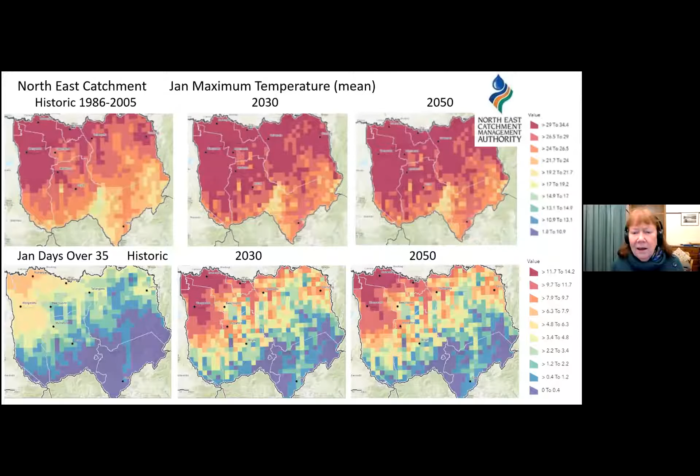And we can see in our record that this is happening as well. So that top graph is Wodonga, days over 38 degrees from about 1970 on, and you can see that clear pattern of warming from about the mid-90s onwards. And that's the pattern that we're seeing projected in these future patterns.

And even though we've had a mild summer for various reasons this year, the previous two summers, we might recall, were not mild at all. And in fact, 2019, as you can see on that map, that dark brown colour, was highest on record in terms of heat. So 2019 was the summer where we had a number of highest ever temperatures broken. And in Wodonga, they broke their record twice in about a week. In January, I think Wangaratta got very close to its record.

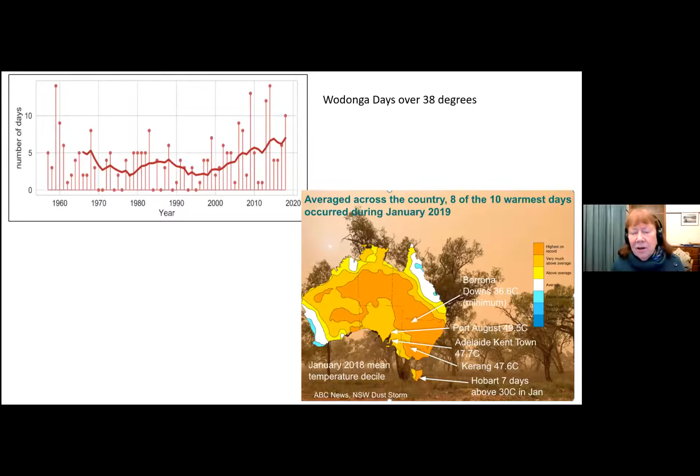And we have to start thinking about what's going to be happening with our summer in the future and how that's going to affect us. Tonight we'll hear about building operations and planning for subdivisions. So you can drill into this data, and this is actually some data I pulled out. This is for the pattern across the whole catchment. And this is actually a graph of temperatures across the year. So this work doesn't just tell you what's happening in a particular area as an average. You can actually pull out the pattern and have a look at it as well.

And so the grey is that historic period, 86 to 2005. The blue is around year 2030, and they don't just take 2030, they take a range around that period and examine that. And then the red is the 2050, and you can see with temperature that pattern climbing. But what's interesting here as well is what's happening to the length of summer. So you're looking down the bottom at the months across the year. And if you have a look, say, at the right, we've got the start of summer, if you can see my cursor, December.

And that temperature that was historic in December will occur in the future, and we're seeing this pattern already as well, earlier in the year. So that same temperature over here is going to occur a month earlier. And at the other end of the season, in February, that temperature that we think of in February historically is going to occur about half a month later in the year. So summer's not only getting hotter, it's getting longer. And we're seeing that reflected in that last really bad fire season, and we have been seeing it for some years, where the fire season starts earlier in the year. It's basically moving forward in the year, and that's just reflecting these hotter conditions that we're having.

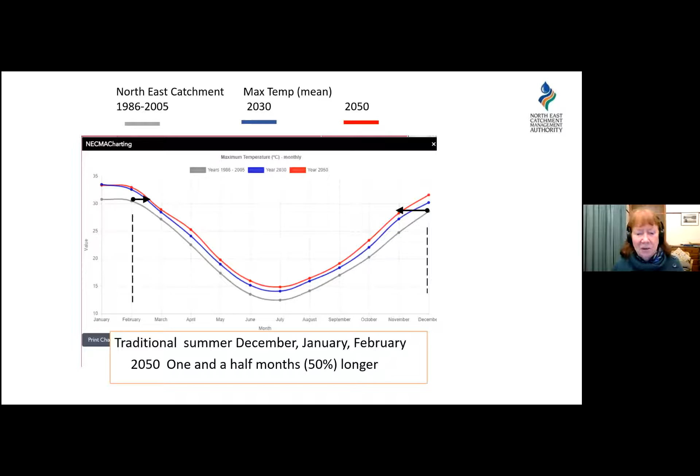So when we have a look at rainfall, temperature in terms of science, knowledge and projections is, I guess, much better known in its future patterns than rainfall, which is a lot more variable. So when you have a look at rainfall, the darker the blue, the higher the rainfall. The yellow areas are that lower rainfall. And again, you can see some change in the area, but it's not as stark as that temperature change. But when you combine temperature and rainfall, that has an effect on how much water will run off from the catchment, because you're going to have higher evaporation.

Just if you pull out the figures for this, about 2030 is not too bad compared to that historic, which gives us, I guess, a decade to make some preparations. But by 2050, we're seeing about a 10% decline in rainfall on average. Not every year will be the same. The sort of thing you'll see is these hotter, dry years occurring more often. And so maybe we would have had one of these really hot years every 6-7 years in the 1980s sort of period, and now we might be seeing them one every 5. I'm just giving you a pattern here.

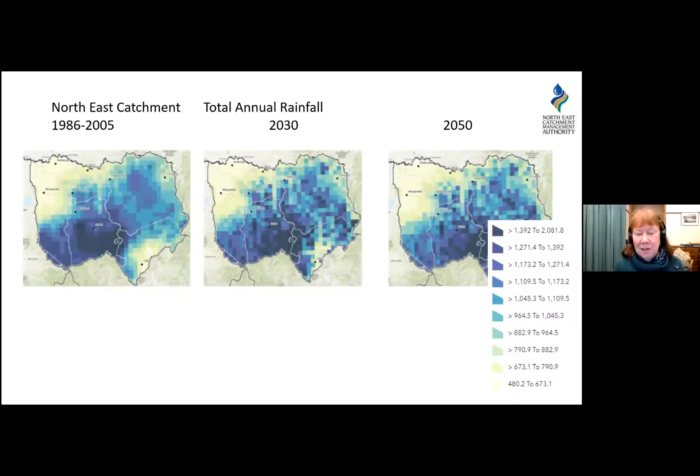Now, these maps have a look at what's going to happen to that runoff. As I said, there's a combination of the rainfall change and the higher temperatures. The browner areas are decreasing runoff. And again, you can see this pattern across the catchment. You've got the historic over here on the left, 2030 on the upper right, and the 2050 on the lower right. And so you can see in our area, there's a drying pattern happening, surface runoff, and over in the east as well as a number of areas down the south.

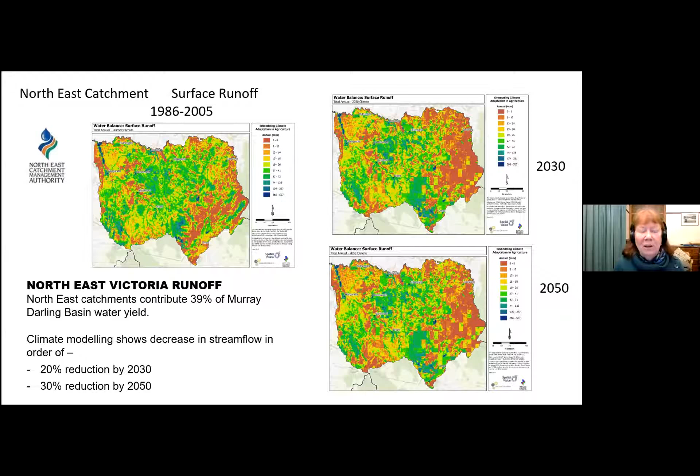So overall, and again, this still has a degree of error in the projection, but the modelling is of the order of around 20% reduction in runoff and stream flow by about 2030 and up to 30% by 2050. So that's quite significant. So overall, what it means is we're going to have, on average, not every year, but more years than we've ever known before will be longer, hotter summers and drier years.

So this just gives that sort of summary, and trying to bring it down from some of the national figures that we might have. So for Australia, we know that in the last century, the mean has become around 1.4 degrees hotter. But when the mean becomes hotter, those extremes become more marked. They expand further than we think from the mean. So we're looking at twice as many days over 35. As I said, summer is going to be at least a month longer in the future.

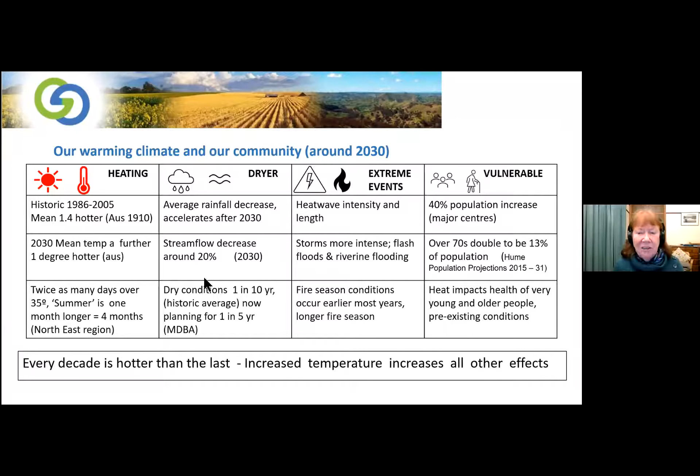By 2030, we're going to have these drier conditions. The fire seasons will be longer. And the other issue is we're looking at potential heat impacts because we're going to have an older and larger population as well. So they're the sorts of things we have to think of. And for the last few decades, every decade has been hotter than the last. So it's quite a lot to adapt to.

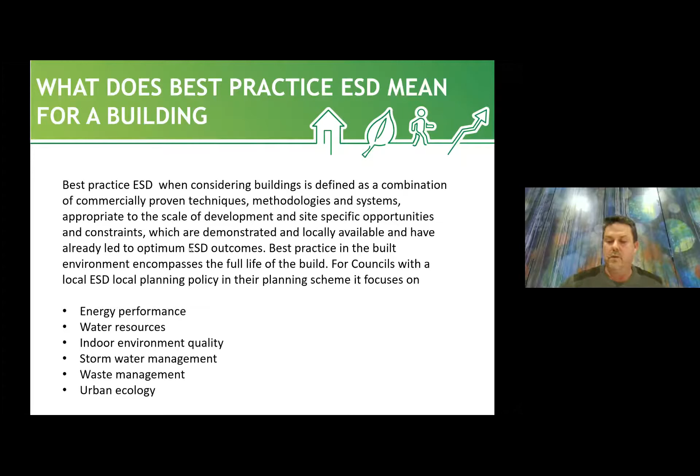The overarching objective is that a development should achieve best practice in environmentally sustainable development from the design stage through to construction and then into operation, which goes to the point that was just being mentioned, that some people don't always take up the opportunities provided to them, be that via landscaping or by how they operate their dwellings.

Local government need to be leaders first, in combination with the planning system, and to ensure that a council is delivering on what they expect the community to deliver. Each council should have their own sustainable buildings policy, which goes beyond what is being asked of the community. Preferably zero carbon developments presented by councils, but we'll get to zero carbon in a minute.

What's happening at a state government level? Due to the number of local governments with an ESD local policy continuing to increase, the Department of Environment, Land, Water and Planning has moved to introduce statewide ESD measures into all planning schemes across Victoria. I'm certainly not here to bash the state government departments because they're doing some really, really great work. And this project that they're delivering now has stalled a little bit, but I'm hopeful it will kick back into gear and deliver ESD requirements to all the planning schemes in the near future.

This will recognise ESD across all local governments, not just those who have extra resources, both human and financial. And generally speaking, those councils that do have an ESD resource are generally more well off in comparison to smaller rural and regional councils financially. But it will become the measurable requirements for developers to meet moving forward.

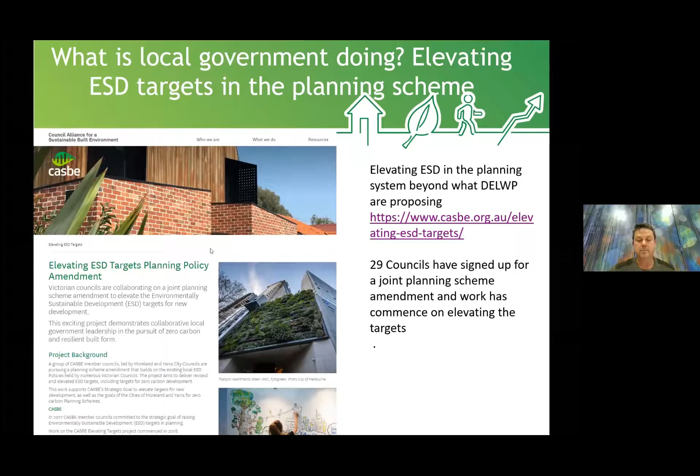For many rural and regional councils, the creation of a subdivision results in the creation of a new community. What started off with 6 councils in 2017 grew to 16 councils in 2019, and now has hit 31 rural and regional councils, along with growth area councils, trialling the sustainable subdivision framework over 18 months. That's 31 of 79 Victorian councils, which is the highest uptake of any voluntary scheme anywhere that I'm aware of. It's an extraordinary number of councils trialling this.

The aim really for us is to collect data on what subdivisions of greater than 3 lots are implementing across the participating councils and work with willing developers to implement ESD measures into their projects. Admittedly, there's been limited uptake by developers at this stage, and I totally understand that. It's quite a large document to enter data into, but the data is what's important at this early stage, and understanding what we're doing well, where we can improve, and how the planning system assists in setting the measurable standards in the future is really important.

Sorry for ranting on about the planning scheme, for those of you who are still awake, but it's a bit of a passion of mine, and one where I feel there's the greatest opportunity for local governments to implement and actually make meaningful change. So the creation of a subdivision is the creation of a community.

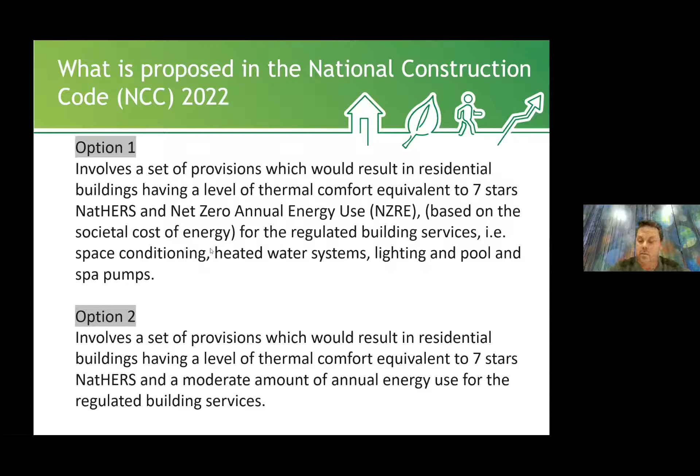This is basically telling you that the National Construction Code is moving to 7 stars in 2022. And if you're not building to 7 stars now, or starting to design to that, then your buildings will be obsolete very soon. So what does the future look like? It's inspiring to hear Dion talking about what he's wanting to do and is doing and will continue to do. And there are others doing similar things now.

Well, the future is here already and exists in developments like The Cape in Cape Paterson just south of Wonthaggi, where dwellings are a minimum 7.5 stars, have a minimum 2.5 kilowatt renewable energy system attached, in a community where water quality is a high priority, with electric vehicle charging stations, and trees and vegetation to reduce the urban heat island effect and provide cool paths for people to use alternative transport modes. The subdivision is not connected to gas, hence the housing is all electric.

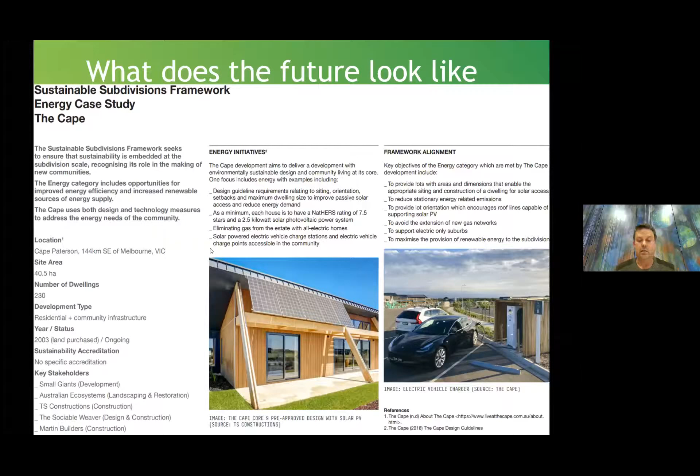Here's another example. This is a case study of Salt in Torquay. And as well as the two examples I'm showing, there is another one just being developed. It's a Villawood development of land in Sunbury, where they're not connecting the subdivision to gas. Instead, they are offering to provide solar and battery storage as part of the land package. This is actually cheaper for Villawood to provide, and the uptake from residents buying the lots has been overwhelming, and they said it hasn't affected their sales at all.

It's about integrating water quality measures on site when land is not too flat to allow the water to be soaked back into the land and be treated on site before going back into the waterways, not shipped away via a pipe straight into creeks and waterways with high nutrient loads and suspended solids.

My takeaway message is that the state government is moving on ESD. The National Construction Code is moving to 7 stars in 2022. So no one should settle for less, otherwise your dwelling will be obsolete before complete. It's all about all of these things and many, many more things, but 10 minutes is not long, especially when you're focusing on legislative stuff.

Greater planting of street trees with canopy coverage and also around your home, depending on bushfire issues. Water efficient fixtures and fittings, rainwater tanks, landscaping that includes local plant species. Ensuring there is great crossflow ventilation, access to quality natural light and fixed shading to north windows, and operable shading devices to east and west facing windows.

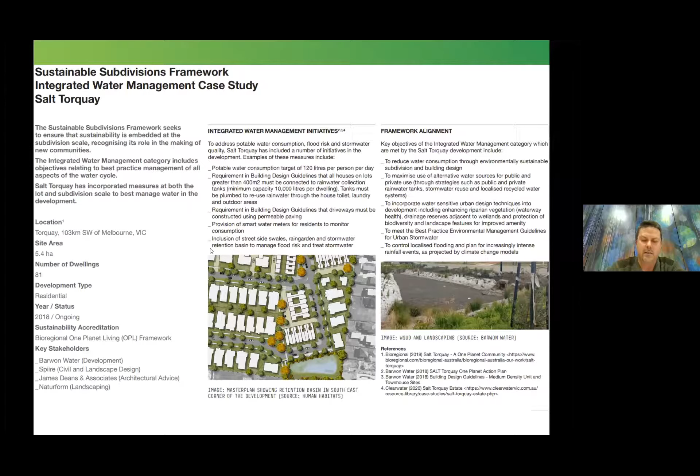Too often I hear about and see a great set of plans be handed over to someone who doesn't understand what it takes to make a building airtight, how to use permeable membranes and installs them incorrectly, and how to ensure mold doesn't grow, has not installed insulation correctly and created a break for air to leak out, hasn't insulated the corners of the building, and generally just hasn't taken the plans to the level that they were designed to. Sorry I went over, and thank you everyone.

Simon, thanks very much for that. A great sort of picture of the environment that we're working in, a few tips at the end there about how to get what we need from the people providing us with services if we are going into the building. Thank you again for that. And finally, our last speaker tonight, Lockie Gale from Ovens and King Builders here in Wangaratta. So Lockie, if you're ready to go, I'll hand over to you, please.

Thanks very much, John. It's a pleasure to be here, and it's a pleasure to listen to the other speakers. I've really got a lot of value out of listening to all of them. Clearly a lot of passion there and a lot of knowledge, and my hat's off to all of them. They're doing great work.

From my point of view, I guess I work at the pointy end of actually coming up with the goods in the constructions that we have. I'm very fortunate to work on some really special houses. I know that in the audience tonight, there's a few people that know that personally, which is really, really good. I'm sure some of the stuff I've got tonight is very much preaching to the converted, but in the time I've got, I can only talk to probably 2 or 3 things. Some of it's been touched on already, but I just want to underline that.

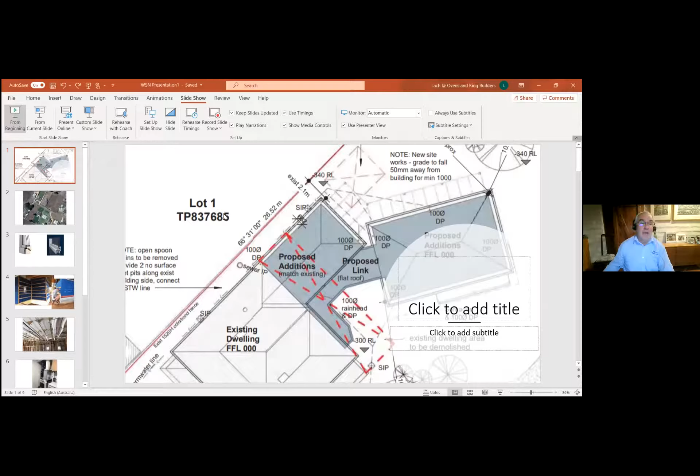I want to share my screen. I've got just a few photos to talk to, which I hope will illustrate some of the points. Some of these photos might be familiar to some people. I hope they've been done discreetly. So I want to talk on 3 things. I want to talk about orientation very briefly, because Simon and Dion have both pointed out the importance of that. I've got some practical examples here. I want to talk about technology for better performance, and I want to talk about the thoughtful execution of these things we do to get the result.

So here's a screenshot of a plan that we're currently working on. It's an existing house. It's an older style house. It's a Federation house, double brick, thermally. We all know those older red brick houses facing the street. Window orientation just wasn't a factor in 1910 when they were built.

But here's an example of a renovation extension where the thought's gone in to create a new living space, which is going to take advantage of solar passive design principles, get some northern orientation in the main living area, and help transform that house into a much more efficient, much more livable space. It's still done in a very compatible style to the existing home. It's still red brick, but the cavity red brick is insulated. The windows are double glazed.

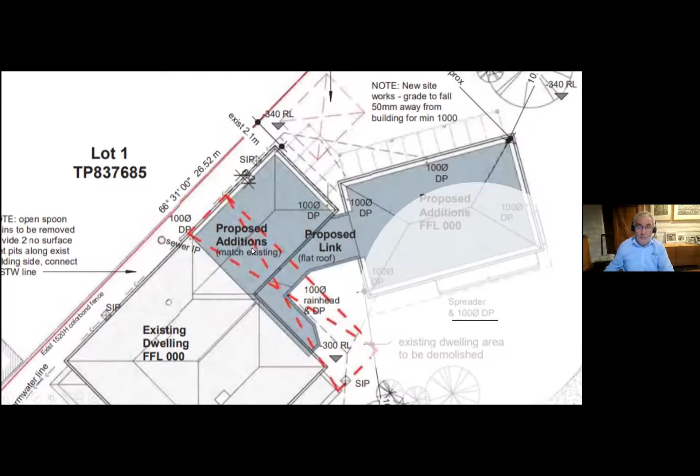And yet the house we built, which rated pretty well, is certainly very livable and very comfortable. It didn't take much on a block that size to achieve great orientation. Too often we see estates where this mindset of you've got to face the road just rules. But it can be done. It absolutely can be done. So orientation, it's basic, it's free, it sets you up, and it's proven. So when you sit down to design, that's the first thing.

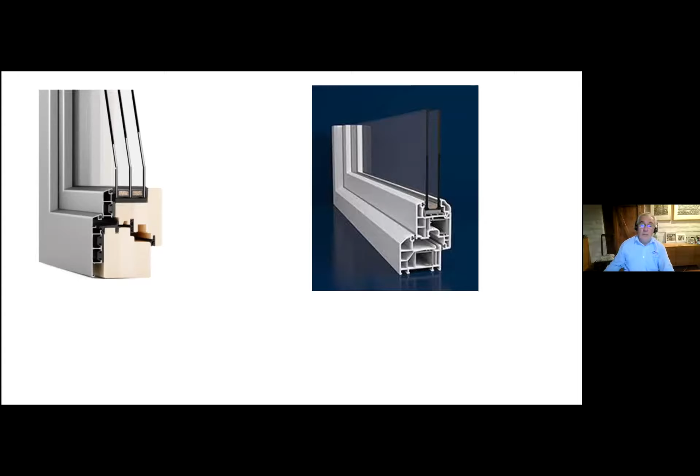Membranes is increasingly an area of development, and Simon alluded to the importance of membranes in controlling moisture, controlling mold, things like that. In recent times, the traditional sisal paper, the silver foil, often with a blue coating, often with a builder's trade name marked on it, the National Construction Code has largely sidelined that because in effect it doesn't breathe. It doesn't breathe at all.

An analogy is wrapping your leg in a plastic bag. What's going to happen? You're going to sweat. And wrapping your house in a traditional sisal and sealing it up effectively, taping that in and really doing a good job of that, the material just traps moisture in the house. So we deal a lot and have done for years in breather membranes.

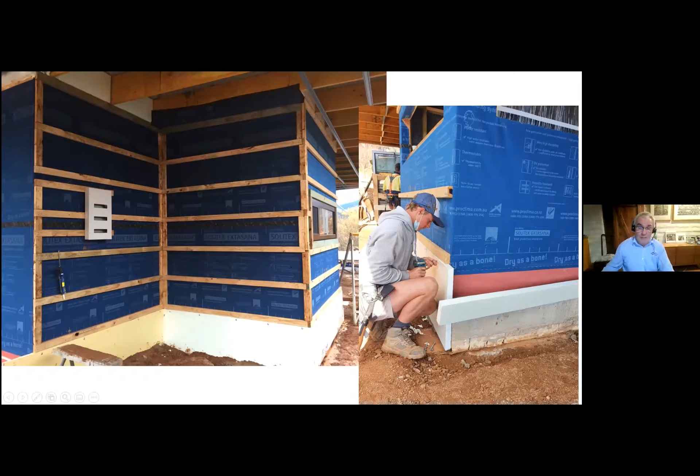So these kind of internal membranes, they've got a great role in actually bringing the house down to a point where you can control the airflow very well. You don't have to necessarily go to a full passive house certification, which is still a popular thing, but we can build really effective houses controlling the airflow.

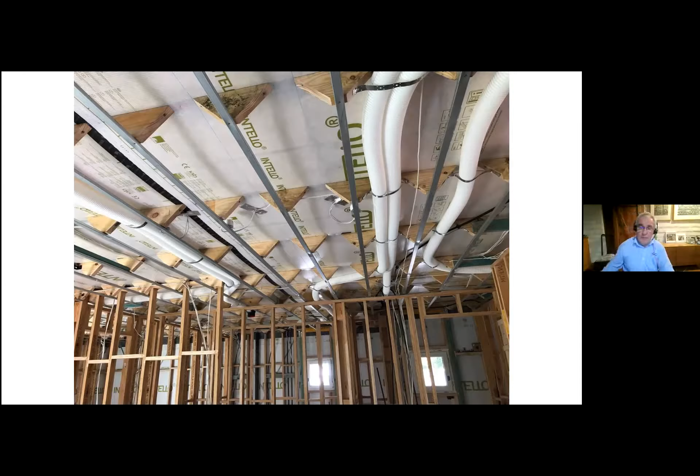The pipes you see in the ceiling there are related to a heat recovery ventilator. So when we build something very airtight, we've got to make sure that we're getting fresh air in. And we can do that by a unit like this. This is a Zehnder ComfoAir.

It brings fresh air into your house and it expels the stale air, but only expels the stale air after the energy that you have in the house is transferred into the fresh air. So you don't have any energy loss. It maintains your comfort levels, gives you fresh air.

We're starting to see bushfire smoke filters installed on these things, which is a great development in places like Beechworth and Bright, where they are impacted by the necessity of control burning in the autumn, and unfortunately the bushfires when they roll through in the summer at times too. Again, a bit more technology.

All these things I'm talking about are proven technologies that have been brought to us from mostly European countries, where they've dealt with these issues of thermal comfort and healthy houses much longer than we ever have. There's some criticisms around some of these technologies at times I hear. Generally, when I dig down, they're pretty ill-informed. The systems are generally pretty proven.

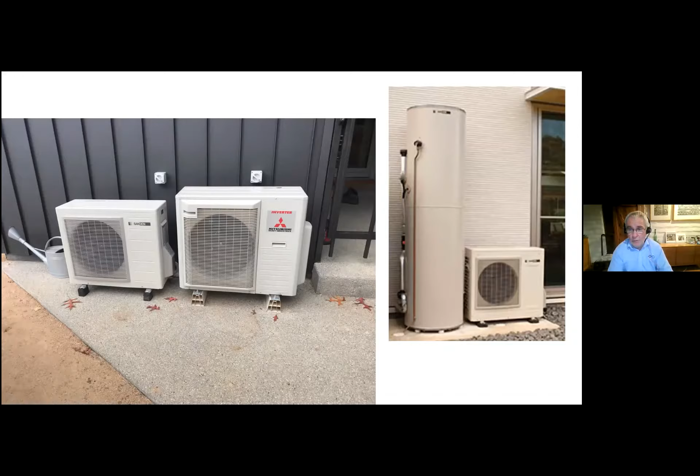Besides the technology, I just want to touch on the execution of what we do. We can set up regulation, and we need to set up regulation. I've only observed significant change through regulation, although the passive house movement is one which is not done by regulation, but is done by enthusiasm of people who can see the value in it.

So we've currently got a 6-star under NatHERS. NatHERS is a government body that sets the standard for energy rating for Victoria specifically, as well as parts of Australia. We currently have a 6-star. We're moving to a 7-star, and Simon's absolutely right. If you're not building 7-star now, you're really behind the 8 ball. I'm lucky enough to build houses where our average is sort of 7.5, 8 stars. The highest we've done is 8.9.

The star rating system is pretty imperfect, I have to say. It measures parts of the fabric of the house. There's lots of things about the performance of the house that aren't measured, that perhaps could be. The passive house standard is an example of a whole of house system that measures every aspect of the house's function. But look, before we had 5-star and 6-star, the major players, the project home people, weren't inclined to do anything. So moving that along to the 6 and 7 stars, and hopefully beyond that, is the way to bring them to heel into what is overall a community benefit.

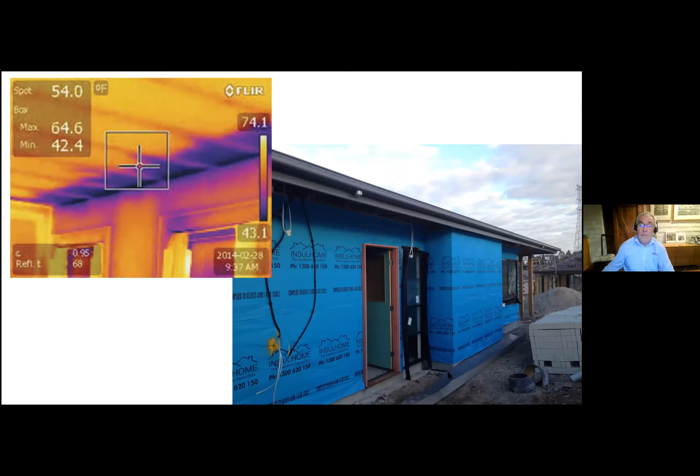Adopting the technologies wherever you can, that's important, and making sure that you're dealing with people that are going to do it effectively, that are going to provide you with what you think you're buying. That's really important. So, yeah, I'll leave it at that, John.

Lockie, thank you very, very much for sharing all of that knowledge with us. Fascinating stuff and really interesting. It's been a great night for just seeing the problems that we're going to have to face up to, and also seeing some of the things we've got at our disposal to help us to deal with that future.

Look, folks, we've run well and truly over time. I'm noticing though that we've still got a lot of people with us. So I've got one question here that I'll just throw to anybody who wants to answer. And the question is, are there countries or jurisdictions that require an air leakage test on buildings? I can talk to that, John.

The National Construction Code in the last iteration introduced a minimum air changes per hour for new construction, and that is in Australia. We're supposed to build houses that, measured by air changes per hour, the air in a room will change no more than 10 times. That's the regulation in the construction code at the moment.